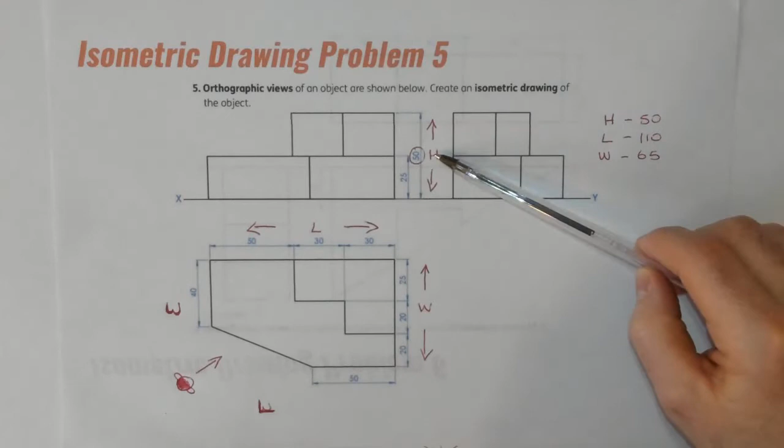In this case, the height of the object is 50 millimeters, which we get from the elevation. So I move the height over here, 50. I get them to work out the overall length of the object, and that's going here. We can see the length here going from left to right: 50 plus 30 plus 30 is 110.

And then the width or depth of the object, we can see down here also on the plan: 20 plus 20 plus 25 adds up to 65. So there's our three main measurements.

And now what we're actually going to do is work out essentially how we're going to draw it, since we're given the 2D views. I would often get my students to sketch out the solution first, if we can.

When I'm actually sketching it, I want to position a person. If I imagine a person around this object here in my plan view, I want to position them in the best possible position so they'll get a better overall view of the object. So if I put a person here, you can see the head, then the shoulder and the shoulder. They're looking at the object.

I think this is the best position, because as they look in this direction, like the biro, they'll see a bit of this face, a bit of this face, and they're seeing this L-like structure on top as well. Whereas if they were at this side, they'd only really see the back of it. So they're looking at the front of it here, and in an isometric view, that will give the better overall view of the object.

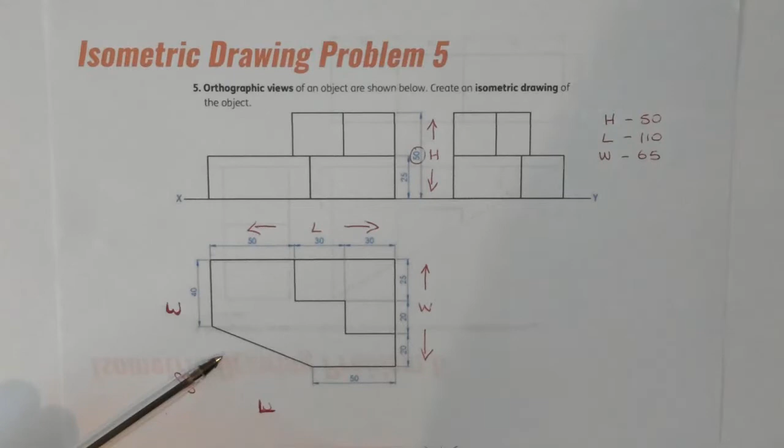In this case, when the person looks at it, because the lengths are going in this direction, the lengths will be on the right hand side of the person, and the widths are going up and down like this, so the widths will be on the left hand side. That's going to help us out later on.

So what we're going to do is just try to sketch in a little solution here. This face here, if I look at that, that's an edge there and it's a face — it's actually this face over here. So I know I've got this little rectangular face here. It's going to be something like this.

I've got a cut surface here at the side of it, so it's going to go at an angle like that — it's not going to be at 30 degrees. And then I've also got a flat surface here at the front of it, which, using our 30 degrees, is going to go something like that.

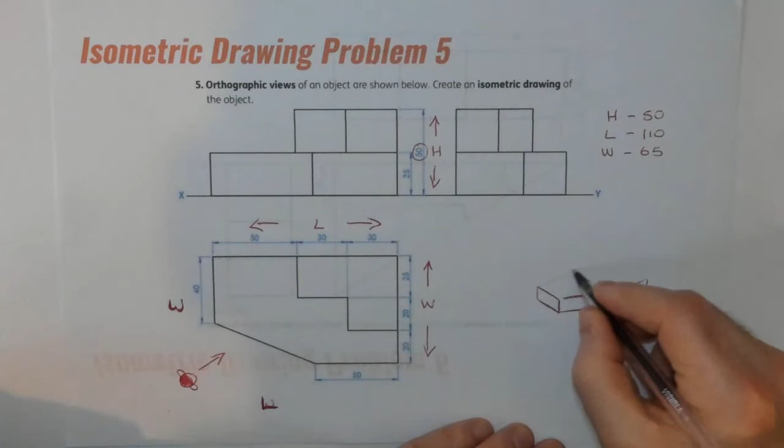Now that's going to give us, if we think of it like Lego blocks, the bottom surface there, without the L on it. I've done this lightly here at the back because I still have to put this little block section on top of it.

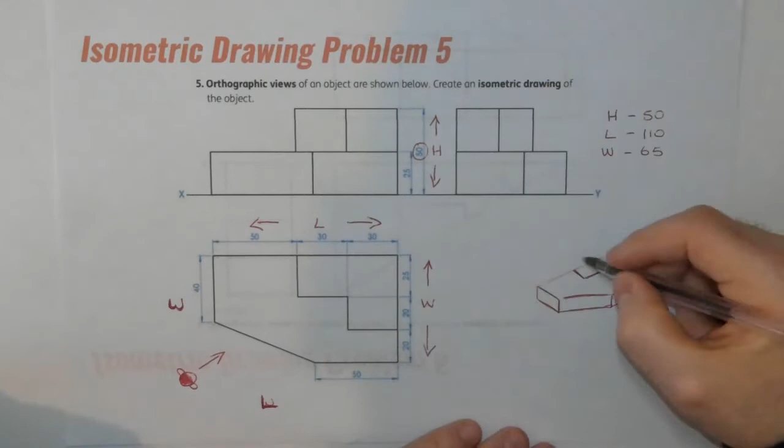Okay, and that's what it would look like if we didn't have this top surface. Now that top surface is kind of like an L at the back, so I'm going to start putting that in. So that L there is going to come out here a little bit, something like that, then it's going to go down, then it's going to go down this way and across like that. Now it has a height of 25 millimeters, so I'm going to step it up a height. I'm going to step this guy up, so it'll all be going up like that.

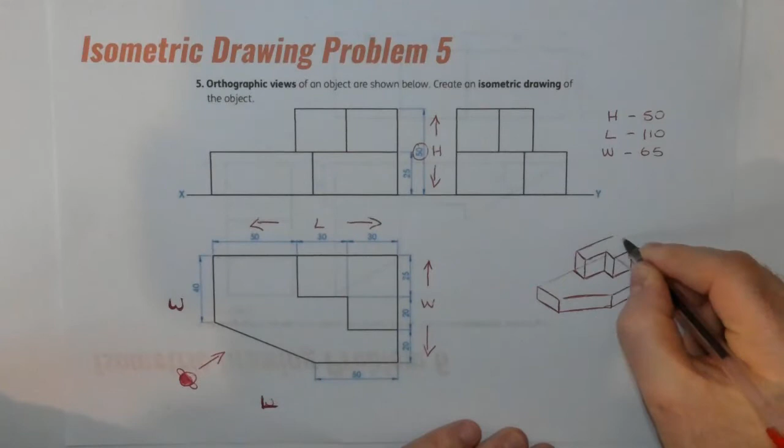And what I want to do is I want to connect that L again, same as I have underneath. I'll finish it off by going like this, and then I can heavy in these edges there. And that's kind of how you would actually build it up, okay? Quite hard to do if it's your first time doing it, but as I said, with more practice you'll get better, okay? So that's kind of going to be our overall solution.

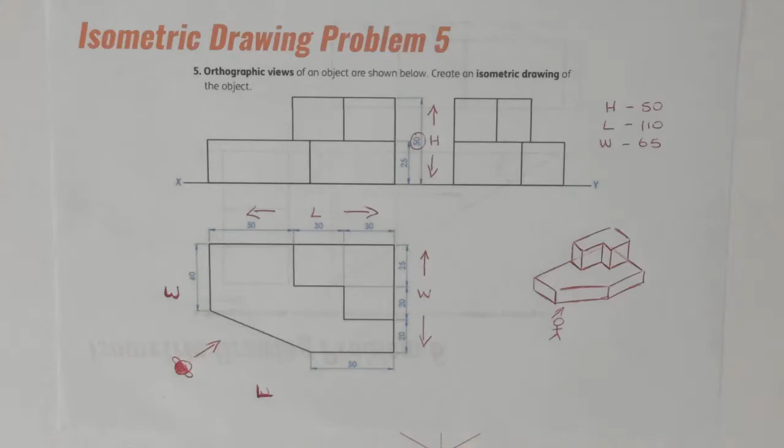Here's our person then. Here was our stick person standing looking at the object, kind of in that direction, looking at it like that, and they're getting an overall view of it. So we're going to try and create that now using the measurements here. So to do that, I've barely started here, and what I've set up here is what's known as the crow's foot, where I do a vertical line, and from this point here I project it 30 degrees to the right and 30 degrees to the left. And I said to you, our lengths are going to go there and our widths are going to go this way.

So for our lengths, we're going to measure our overall length of 110. So I'll project this out a little bit further, as far as I need it. So I'm going from 0 to 11 centimeters, and my widths were 65. So on the width side, I might have to bring it out a little bit further, and I'm going to measure 65 millimeters from the corner right here, 65. Make a little mark there. And finally then, on my heights, I have a height of 50. Just going to measure up as far as the 50. Okay, mark that there.

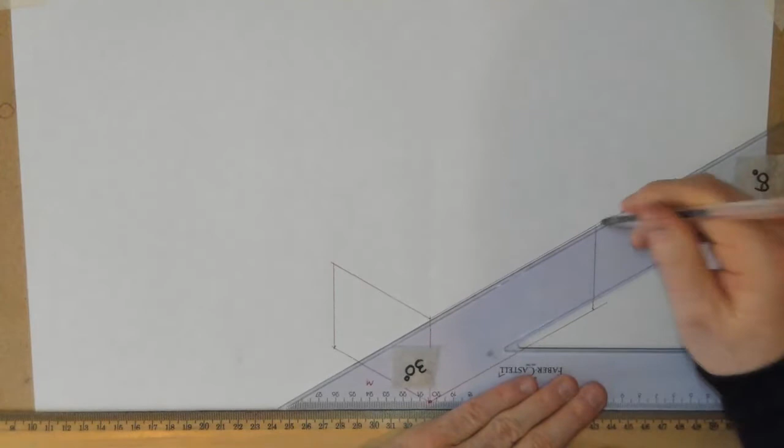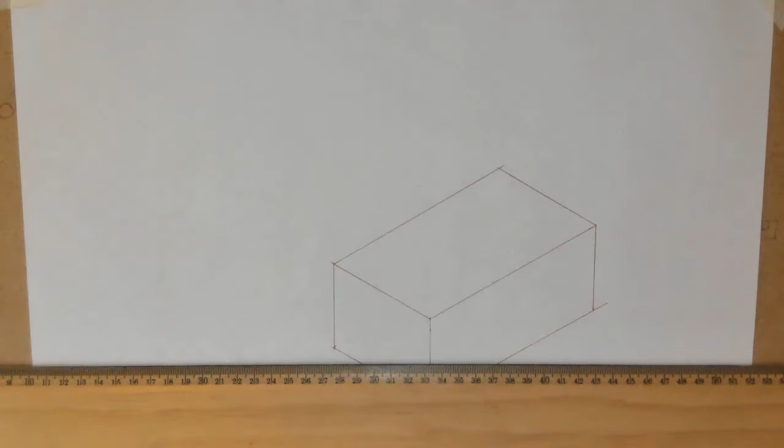And with that 50 done, what we're going to do is project a line at 30 degrees. All parallel faces, or all flat surfaces, are going to project at 30 degrees. This one as well. Project this up. Project this guy up. Just have to extend that a little bit further right there. And what I need to do now is I need to get the top surface. So at this back edge here, I'm going to go 30 degrees like this. 30 degrees like this. And just to get it fully done. There we go. Okay, so we set up the crow's foot, and now we actually have our fish tank in place.

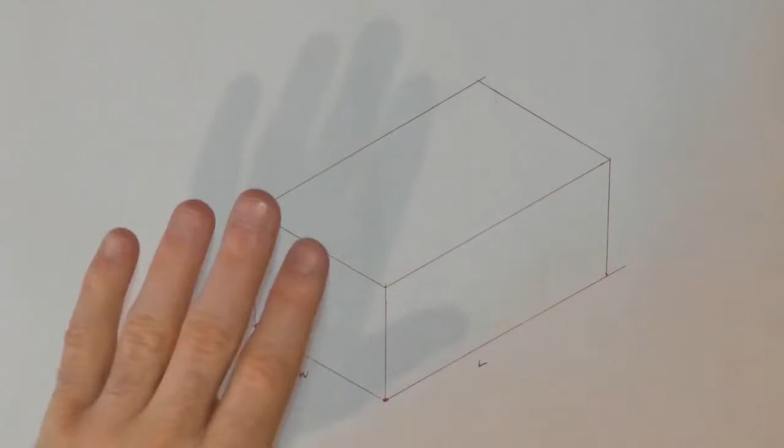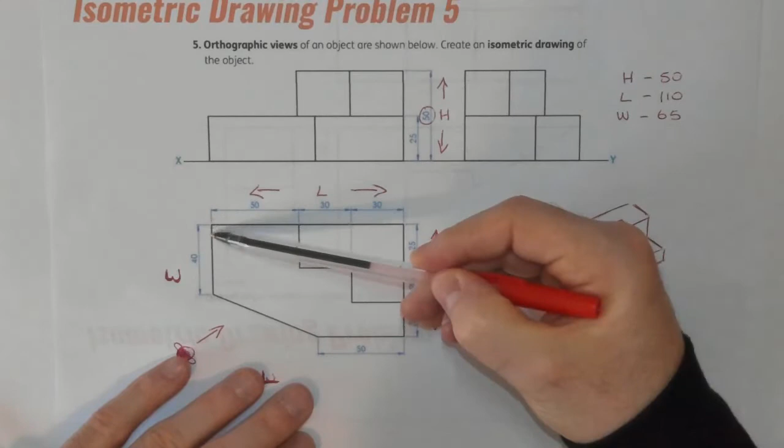So now what we have to do is we actually have to draw in the object. So I'm going to zoom in there now. Just position that a little bit better on the page, so we can see it a little bit more clearly. So everything from my object is going to fit inside here. So if we bring the sheet over again, I'm going to start by building this bottom platform first. And that bottom platform has a height here. If I come up here to my elevation, I can see the height is 25 millimeters. And then on the width side I'm going to measure down 40, and on the length side I'm going to measure in 50.

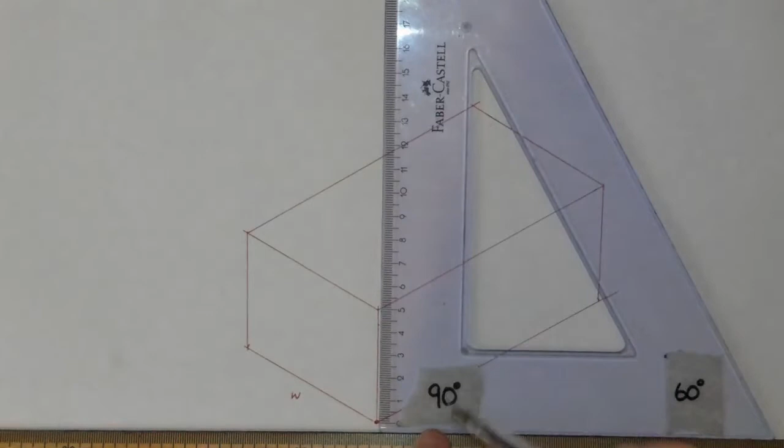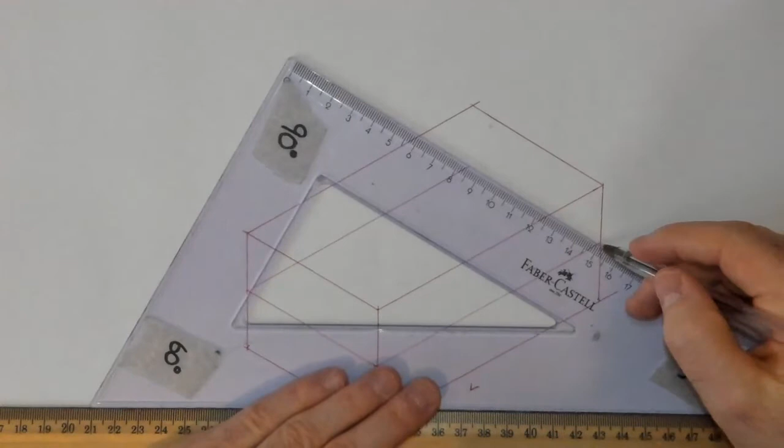So to complete that, I'm going to measure up 25 millimeters starting off. Move that there a little bit. So 25 millimeters to start off. I'm going to measure up on my height line, and I'm going to extend that down along here. I'm also going to extend it over here, and while I'm at it, I'll bring it along the back edge as well. So it's like I'm filling up the fish tank with water. That's the way I'd describe it. So that's the water level after rising the fish tank up to here.

Okay. Now along the front, as I said, on the width side I'm going to measure down 40 millimeters, and on the length side I'm going to measure in 50 millimeters. So on the width side I'm going to measure 40 millimeters down here, from this point right here, mark down 40, and on the length side I'm going to measure 50 millimeters down.

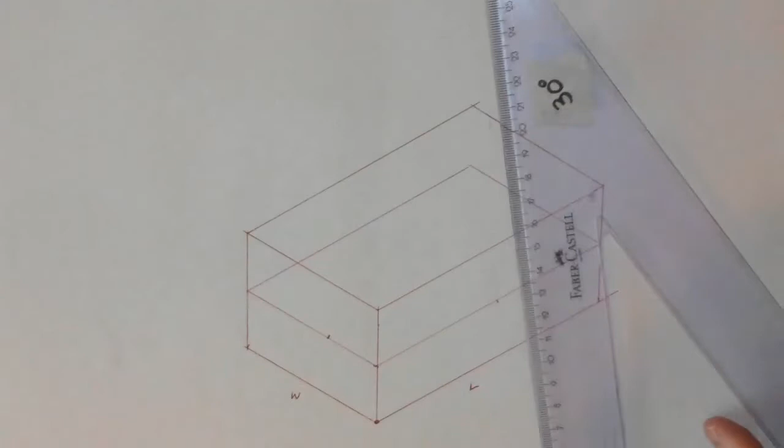There's the 50. At that point I'll do a line down, and at this point over here I'll do a line down. Now what's going to be helpful here is with those two lines down, I need to connect the top point to the top point over here with a line going like that.

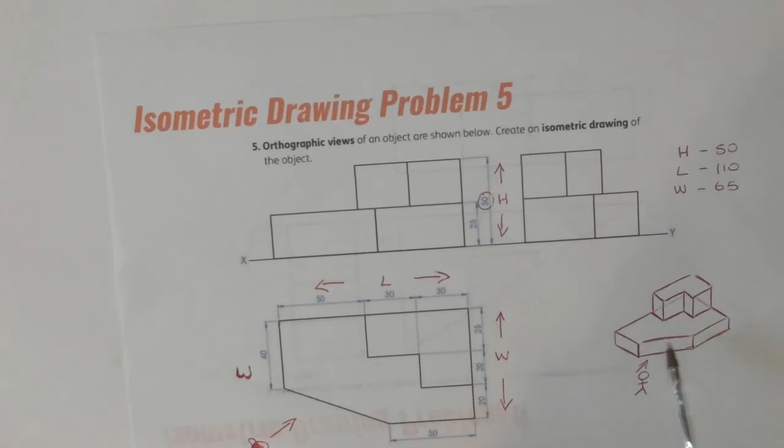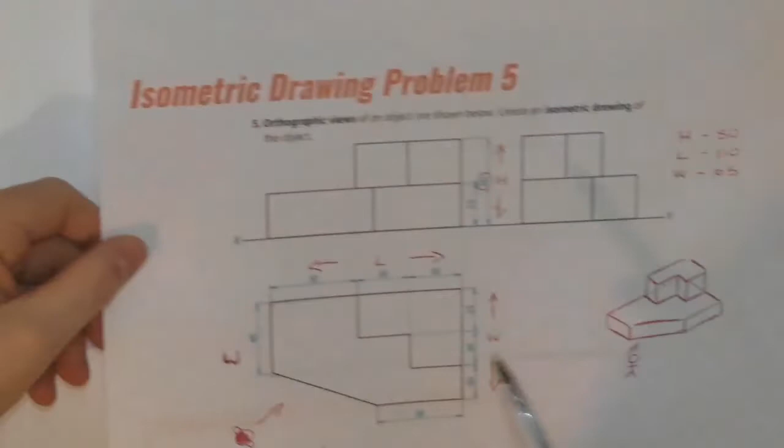I need to create this surface here. To do that, I'm simply going to use my set square, project a line across like this, and a line across like this. What we've actually created there now is that bottom platform. We just haven't heavied it in, so I'll start heavying that in now to give it a bit more definition.

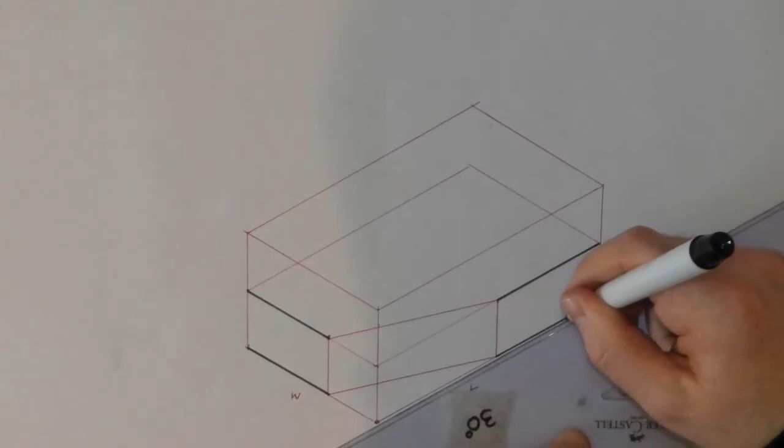So there's that surface, this surface, this surface. Get the lines in to complete them fully.

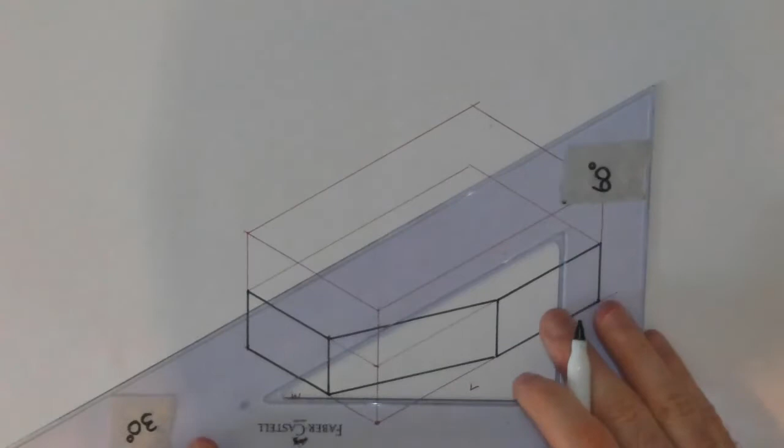Now what I want to do is connect these lines up as well. So here, and here, and then finally I'll heavy in this back to here just a little bit, to give it a bit of definition, and just to about here as well. The reason I haven't heavied that in the full way is simply because I know inside at the back in here I have to make this little structure that has to go in here somewhere.

So with the bottom platform done there, now we're going to do the top surface. For the top surface I'm going to measure two distances along my length side of 30 and 30, and on the width side I'm going to measure 25 and 20 down here.

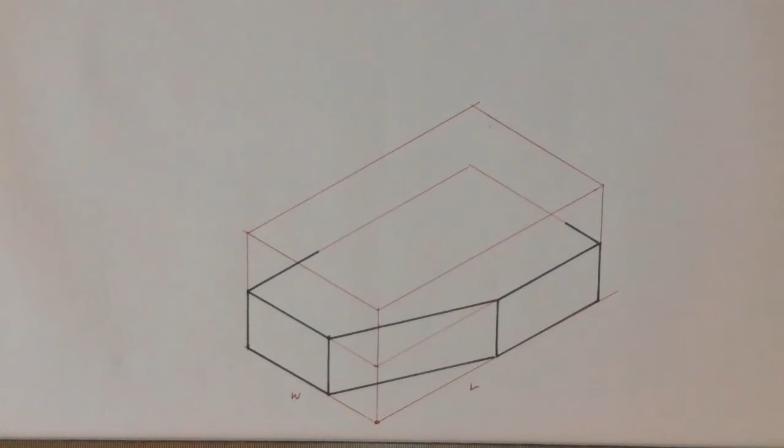So I'm going to do this along the top now. I'm going to measure 30 and 30, starting at 6, measure back to 3, then 3 back to 0. Then on the width side I'm going to measure from this point right here, once again 25 and 20. 25 plus 20 will be 45. I could have measured it down here as well, that would have been absolutely fine.

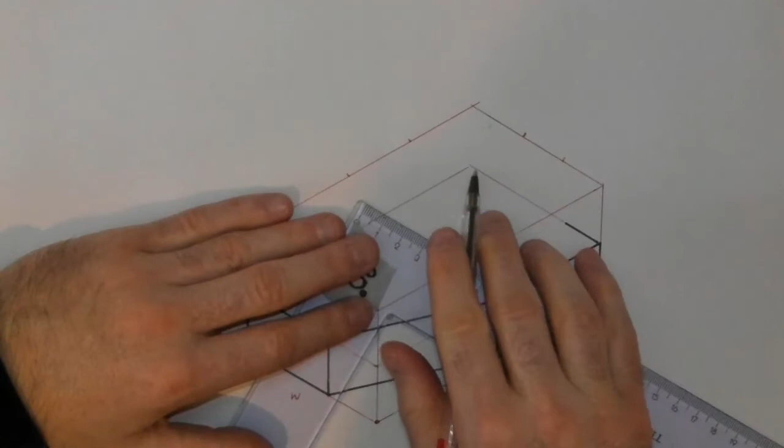Now to make that, what I'm actually going to do is project down at 30 degrees like this, and from this point here turn it around, go 30 degrees that way and 30 degrees that way. I nearly have it, just have to extend this one down a little bit further. So I've actually got the L-like structure on the top now. Just going to heavy it in.

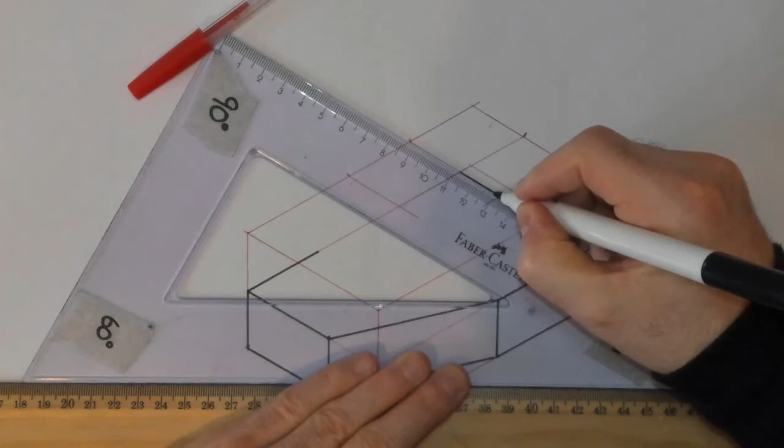Because remember, everything has to fit inside of our fish tank, so it can't go any taller or longer or wider. So there we go. There's our top surface.

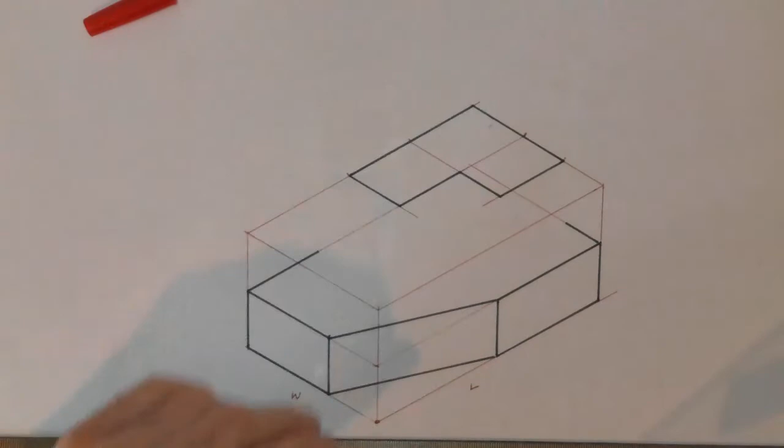Now what I want to do is bring that down to meet this platform. The best way to do that is going to the outside points, bring it down to here. The same with this one - it's going to come down to here because that's where the platform meets it. Now I know where that is going to finish. Likewise on this side.

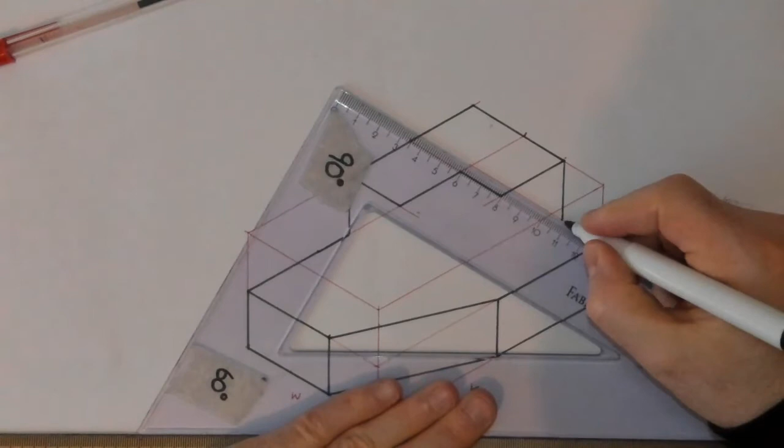Now what I need to do is get the detail in here. So from every point, it's obviously going to go straight down, because with any corner we're going to have 3 lines going in to meet it. Straight down, so it might go a little bit further.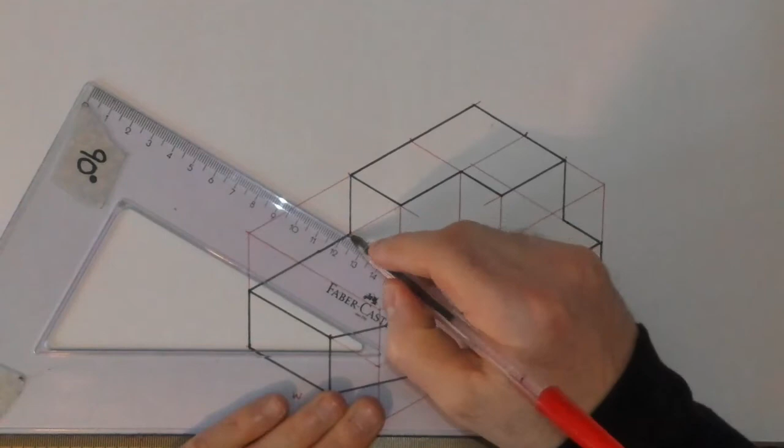And what I need to do now is project it 30 degrees. So this one went 30 degrees this way, it's going to be the exact same underneath. Then it went 30 degrees the other way, so turn it around. Then it went 30 degrees down this way, once again flip it around. And finally 30 degrees back up to meet here. And if I'm accurate, they should meet up. And there - perfect. So once again, heavy the detail in.

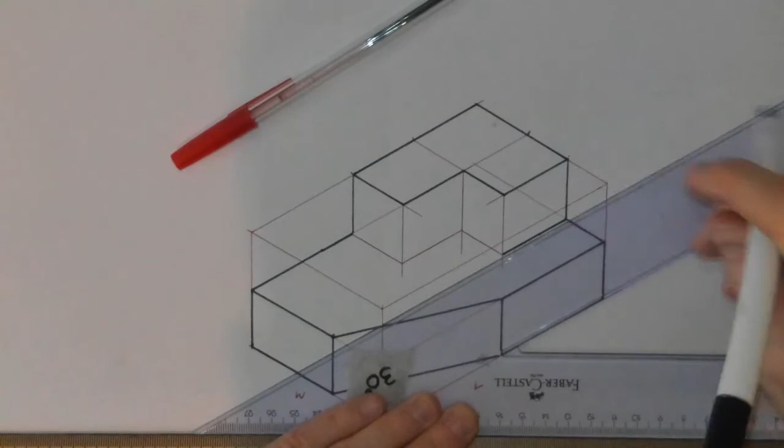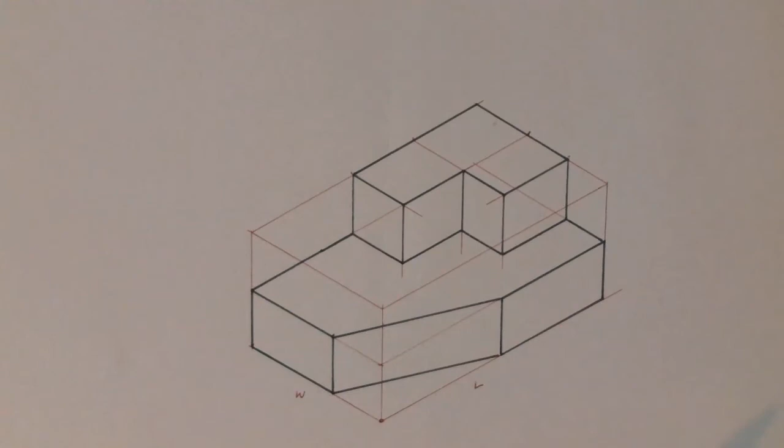So what I often do is I do all my 30 degree lines going in one direction, vertical lines, and then turn it around to get your 30 degree lines going in the opposite direction, here and here. And there you have it - there is our isometric drawing done of this object here that we were given the 2D views for, okay?

And you can see here, very similar to the sketch, okay? So once again guys, hope you found that helpful. That is that question completed.